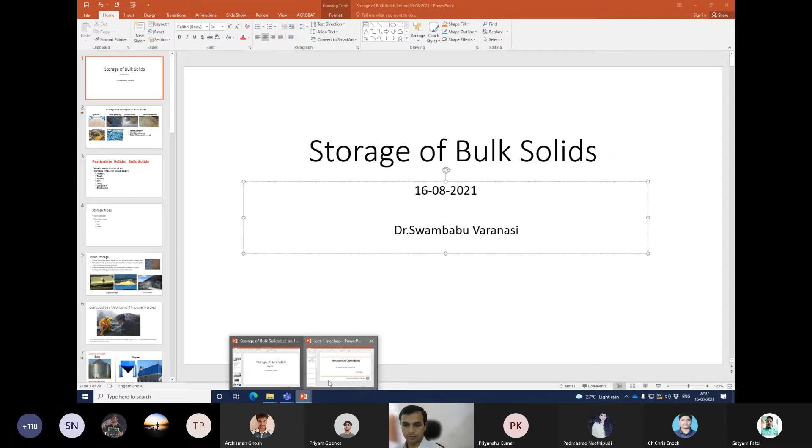So, today we will discuss about storage of bulk solids. Before I move on to today's lecture, I forgot to keep this slide.

All the green parts I will teach. As one student also asked, we wanted to not interfere with each one's topic. I'm starting with storage, handling, and transportation of solids, because this topic has no direct connection with the previous topics. Although interrelated, you don't need any basic knowledge of these topics to understand this. That's why I'm planning to start from this.

So today and next class we will talk about storage of solids. This is the overall course distribution. I'm going to start with storage, handling, and transport of solids. In that we have two subsections: one is storage of solids, and one is transport of solids. So today's lecture and next lecture will focus on storage of solids. That is the plan. Whenever I teach a class, I will show this course distribution slide and tell you where we are, so that you will have an idea.

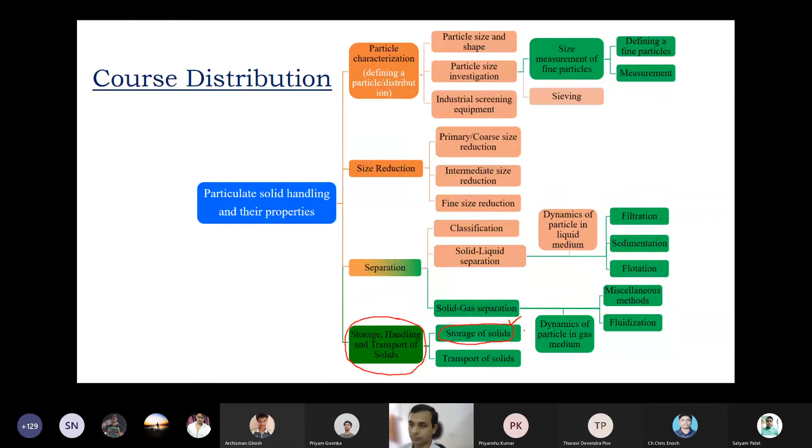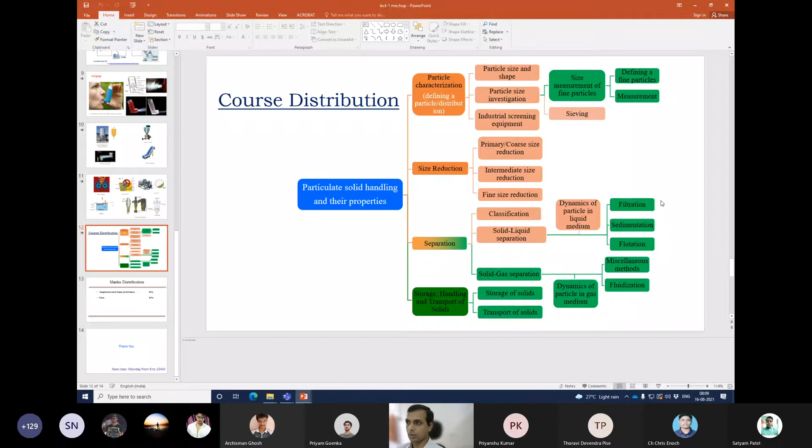Today we'll talk about storage of bulk solids. Bulk solids are used in so many industries. I just kept a few images here with broad industry names: agricultural industry, grains, and different plant products. We have mineral processing like iron industry, coal processing, processing of fertilizers, and processing of pharmaceutical products. So many mineral processing industries. Pharmaceutical comes in a different sector. Then we have fertilizer industries, where also we use solids, particulate matter, particles.

Then we also use construction materials like sand, cement, gravels, and those things. Even in food processing, also we use solid storage and solid handling, and pharmaceuticals also we use. There are some other industries like rubber, plastic industry where we use particles, pulp and paper industry also where we use solids or particles. Power generation, which also requires coal and slag - we also deal with slag and coal - and different chemical processing industries, like last time I showed phosphoric acid production, where we take the phosphate rock particles. So almost all industries, at the beginning or at the end, have to deal with solids.

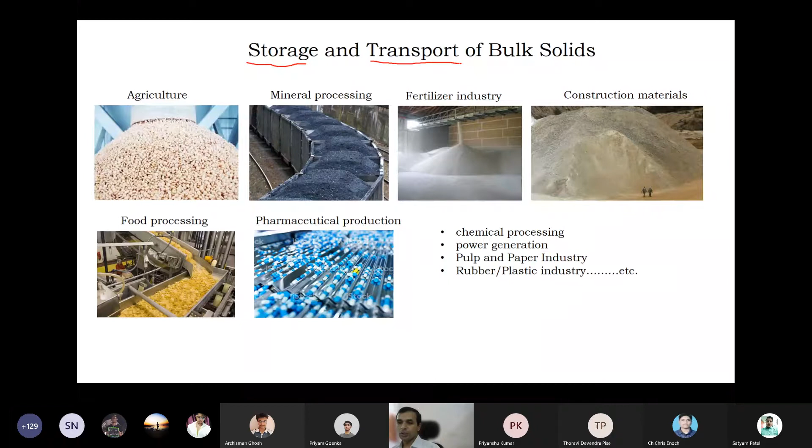When you have to deal with solids, you definitely will have two important aspects. As soon as you say I deal with solids, definitely two important aspects will be: you need to store them and you need to transport them. As soon as an industry handles or tackles solids, bulk solids or particles, then definitely that industry has to deal with the storage and the transport of the bulk solids, right? So we will go to the storage part today, and later we'll go to the transport part.

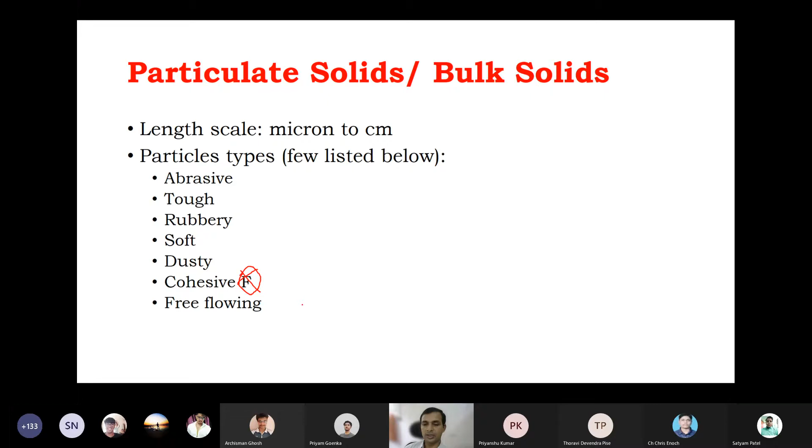Now, particulate solids, the bulk solids, usually in the range of microns to centimeter scale, and just to show how diverse it is, I have listed some particle types here: abrasive particles, tough particles, rubbery nature, elastic nature particles, soft nature of particles, dusty type, cohesive particles - sorry, there's a typo here - and free flowing particles. I'm sure we have seen all these types, either while playing in the ground or while taking food or while trying to purchase something, in our lifetime we have seen these types of particles, right?

So without going more into the general aspects, I'm trying to move into the actual topic, that is storage types. How do you store these solids? We have varieties of solids, and how do we store them? When we store them, what are all the important aspects we will come across while storing? What are all the problems we face while storing? That's all we discuss. The storage of solids is primarily of two types.

One is open storage, the other is closed storage. Open storage means just storing in the open environment - it's nothing but storing the solids in an open environment. That is the name, very simple name, and the definition also very simple. Closed storage means we are trying to store the solids in a closed container, an enclosed container.

There are three types, depending upon the specifications and the shape of the container. One is called bin, another type is called silo, another one is called hopper.

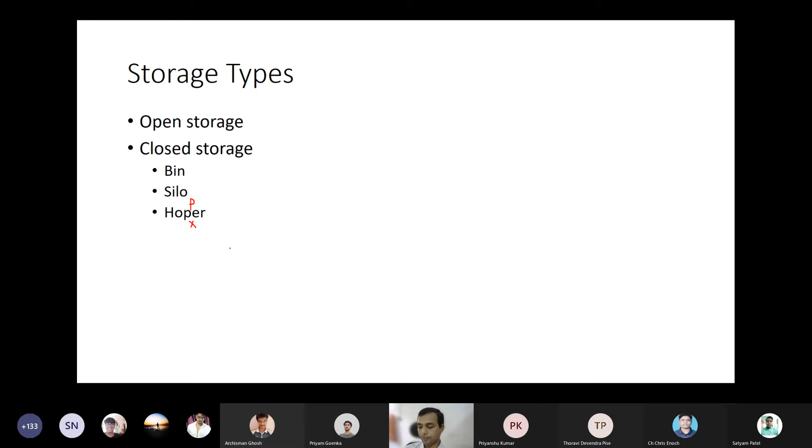Every one of us has seen people storing sand in the open environment, storing gravels or stones in the open, because nowadays in every part of the world some construction is going on. People love this construction-destruction syndrome. They break houses and construct new ones. People always want new, shiny things. We all love it, so construction and destruction will be unending.

That's why I'm sure all of us would have seen storage of sand and gravels. Why do you store sand and gravel in the open? Can anyone answer why we do open storage of gravels and sand?

They are cheap, like no one will steal them. They're low cost. Nowadays sand, not in all states but in some states, people are stealing the sand because it is becoming expensive. Any other reason? Thank you.

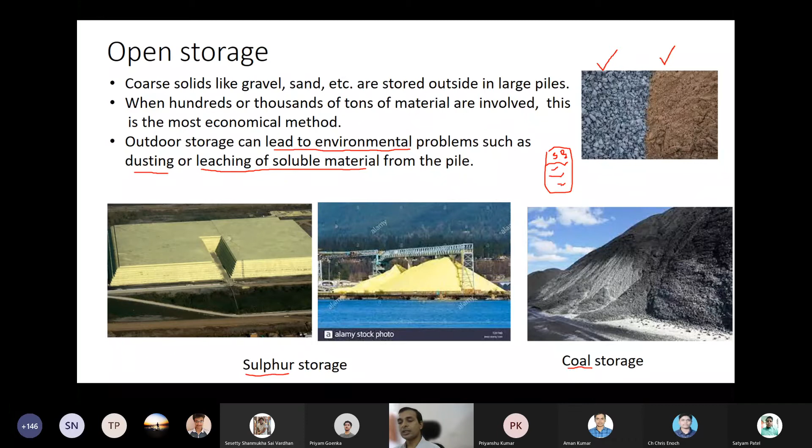I repeat my statement: if you store sulfur in a closed container, whatever free space is there will have oxygen, and this oxygen reacts with sulfur in an exothermic reaction, causing heat buildup. Over a period of time, that heat buildup increases, and at some point it will catch fire if you leave it as it is.

The same thing happens with coal. Coal could be a black bomb if improperly stored—this is the statement made by so many environmentalists. Coal could be a black bomb if stored improperly.

What happens? Coal reacts with oxygen and forms CO2. That's fine, but coal also reacts with oxygen to form carbon monoxide. Coal on the surface can have more availability of oxygen, and more likely that will form CO2.

But because this is a porous material, there will be voids in the coal pile, and there will be air in those voids. That air will be limited, lower than the stoichiometrically required oxygen. So there is a high chance of forming CO inside the heap.

We all know that CO is highly reactive and can emit a lot of heat. Of course, CO2 formation through oxidation and combustion also emits heat. So heat emitted by the CO2 conversion can, over a period of time, catch fire.

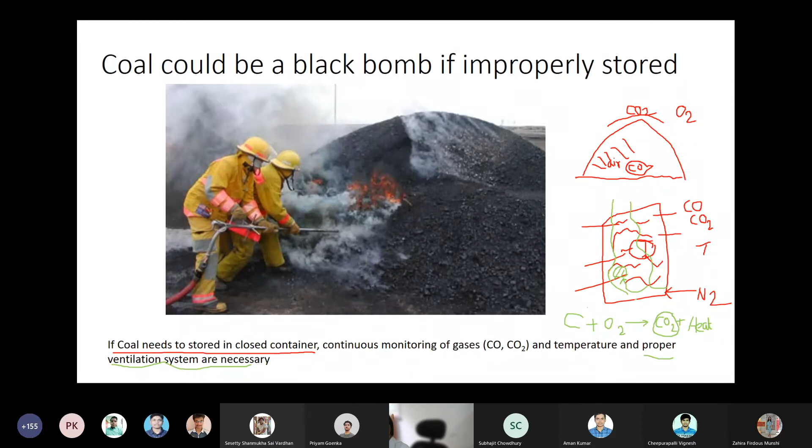So if no questions, we will move on to the next one. So far we talked about open storage, where we store the material in the open environment. Whenever you need it, you will use a reclaimer to fill the trains or conveyors where the solids are being transported. Now we come to the closed storage.

As I mentioned earlier, there are three types of vessels or containers used for closed storage. It's simple to understand from the name closed storage, we are storing the solids in an enclosed container. One type is called bins, which I have given a description of below. Bins, silos, hoppers are all similar, but there's a very small difference. Bins have a large diameter and small height, and are usually made of steel.

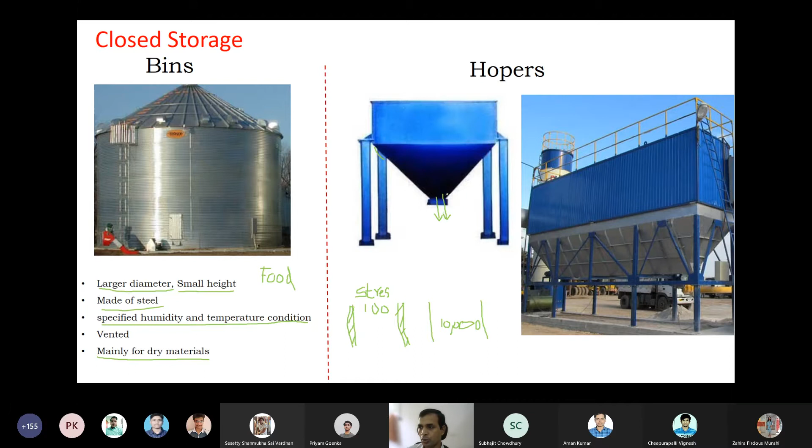Whenever we have the cone, the flowing of solids is easier than without the cone. We all know that, and I will show more details later. Another important thing is called silos. Silos have a smaller diameter and are tall.

At the end of today's lecture, you will understand why we need to maintain small diameter silos, why the silos need to have a smaller diameter with a high length, the L by D ratio should be very high. Why is that we need to maintain a very high L by D ratio? You will understand at the end of this class.

I have a special slide to explain this factor, so I will explain that part later. More often the silos will have a small diameter with a higher length. The silos can be made of concrete, wood, or steel, depending upon what we are storing.

So suppose if you store coal, you don't need wood or steel, we can make it with simple concrete. If something is very sensitive, or it can affect the moisturizing properties very much, then we have to use steel, because steel can stop the permeation of moisture from the outside environment much more than concrete materials.

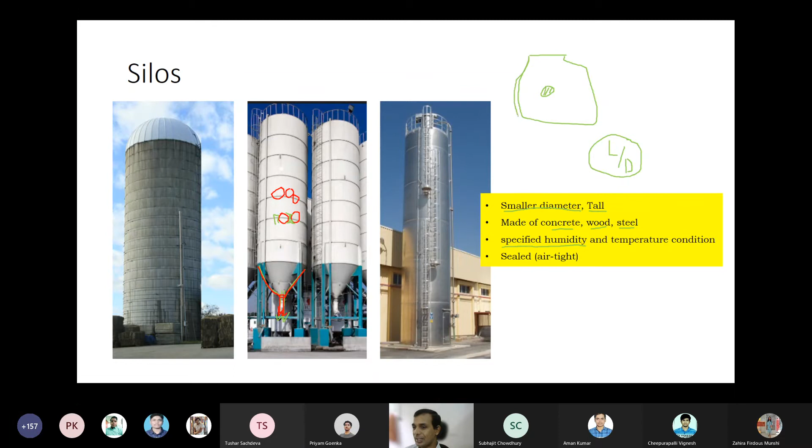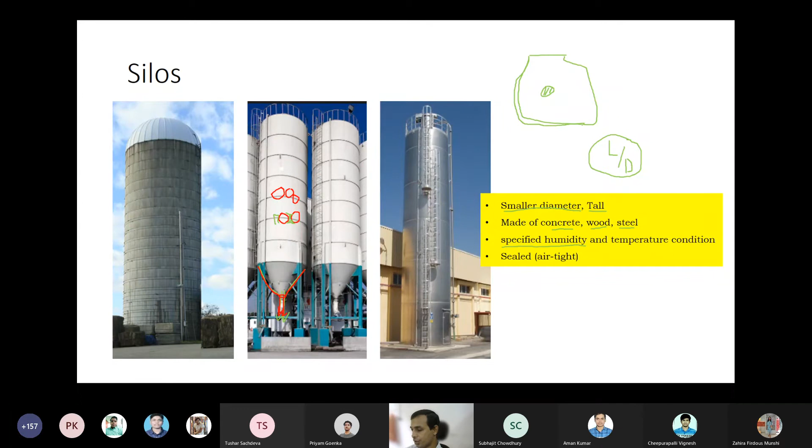If you store certain capsules in a box, they place silica gels with them. Whenever they sell capsules or leather shoes, they keep silica gels because these materials can absorb moisture from the environment, causing decomposition and loss of ability. Shoes, if soaked for a long time in a closed place, get degraded. So they keep silica gel because it can absorb moisture much faster than other materials.

There are two videos from this website. Jenike worked very hard on this silo design, because it's not just about storing—after storing, how to take it out is the most important part. If you're not able to take it out, there's no use. The whole purpose of storing is that whenever required, we need to take it out.

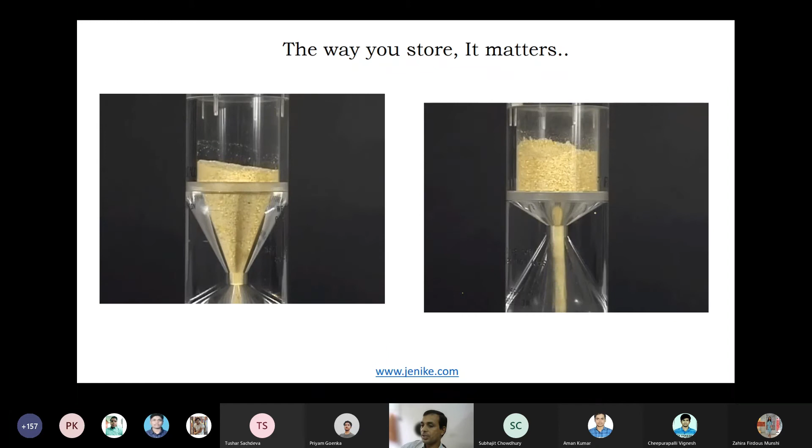To take the solids outside, you have to have a cone at the bottom. Depending on the cone, the particles will flow out very easily. Depending on the cone angle, the flow of particles changes. In the first video, the cone angle is very high, so the flow is easier. In the second, the cone angle is very low, so the flow gets obstructed time to time—stopping, pausing, then suddenly falling. That way there is no uniform flow.

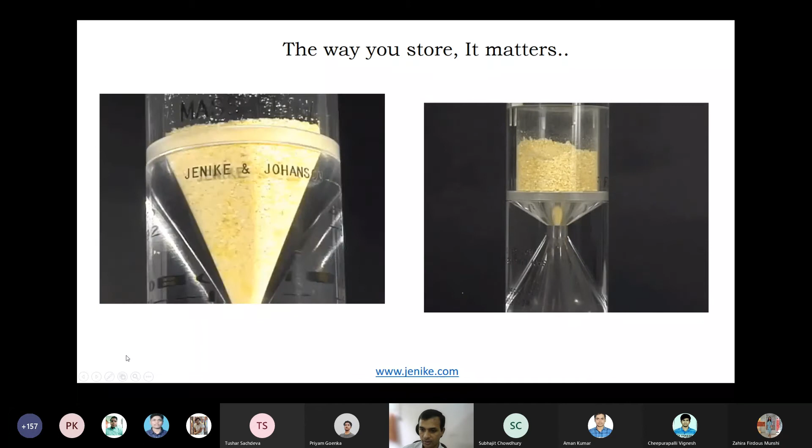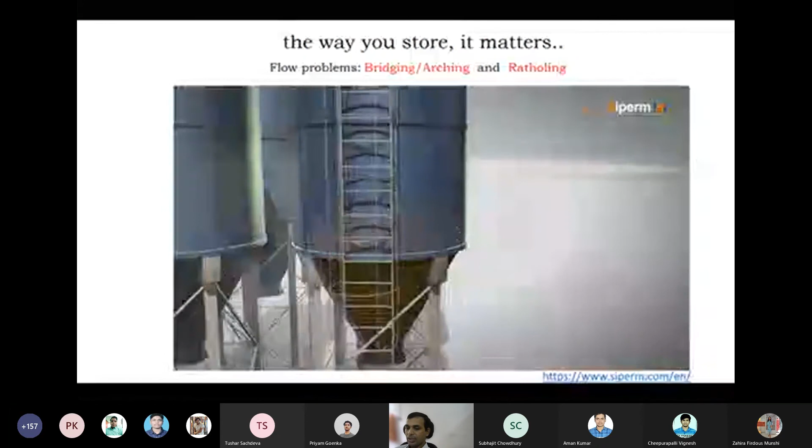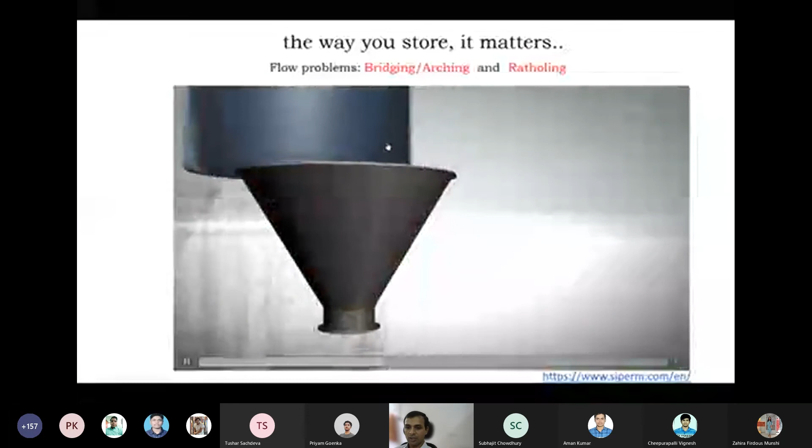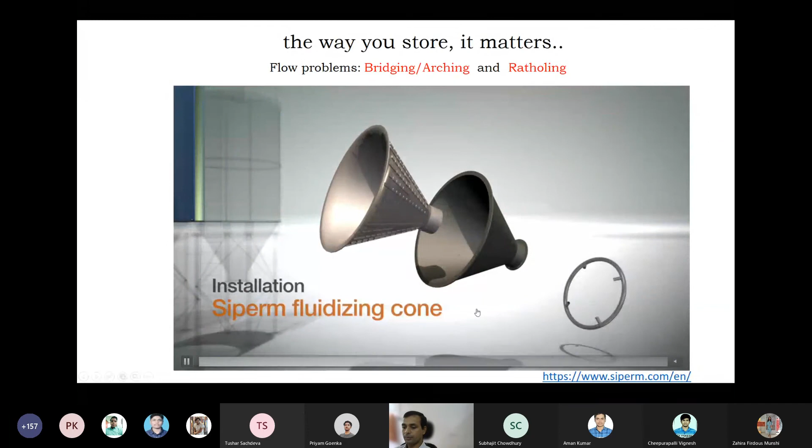Here is another video. This is a typical silo where bulk solid materials are stored, with an opening at the bottom. I'll show later the specific wall we use. Depending on various factors, one problem that can happen is bridging. Another problem is called rat holing, where some materials get stuck at one corner and material only flows at the other corner. This is called mass flow, meaning the particles come out from the silo at a uniform rate. Here you can see the particles coming out at a uniform rate.

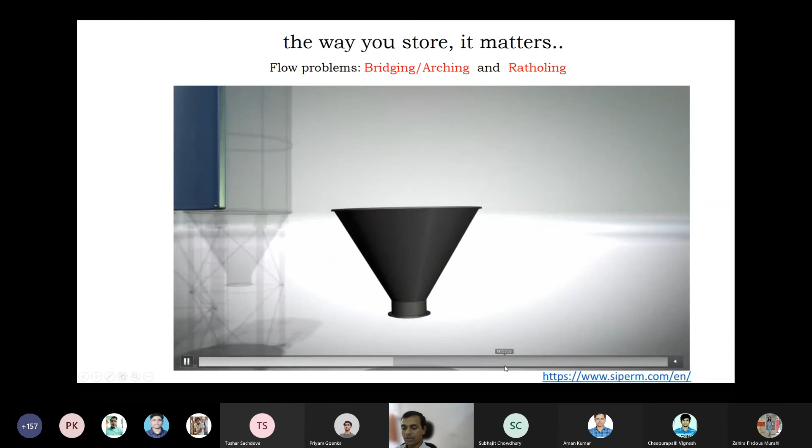I will not touch this. You can see that after a few seconds, this is rat holing.

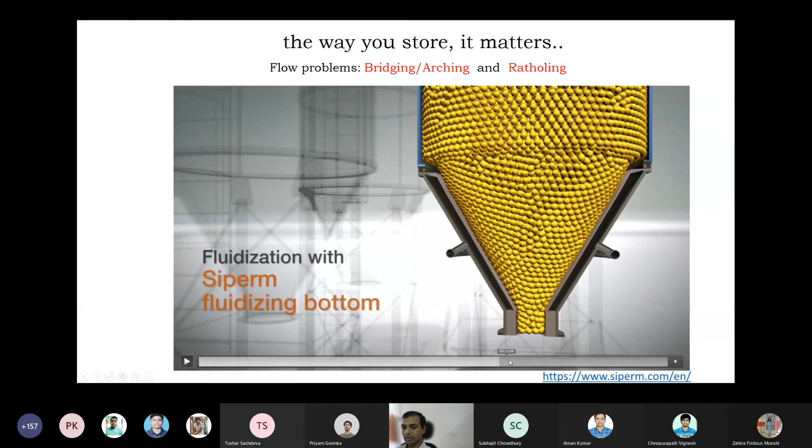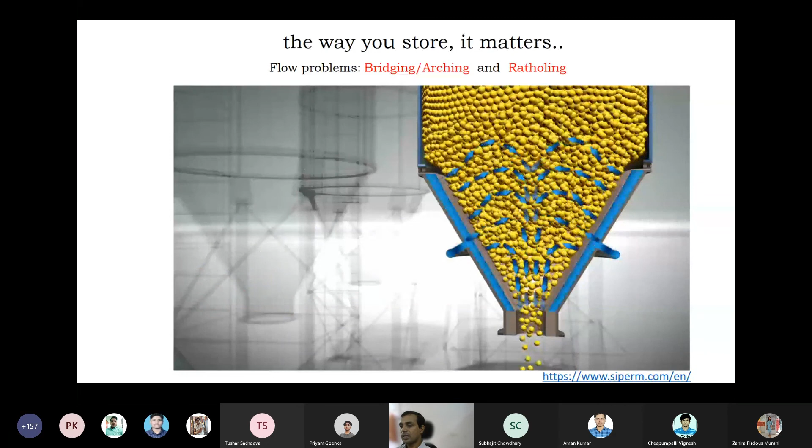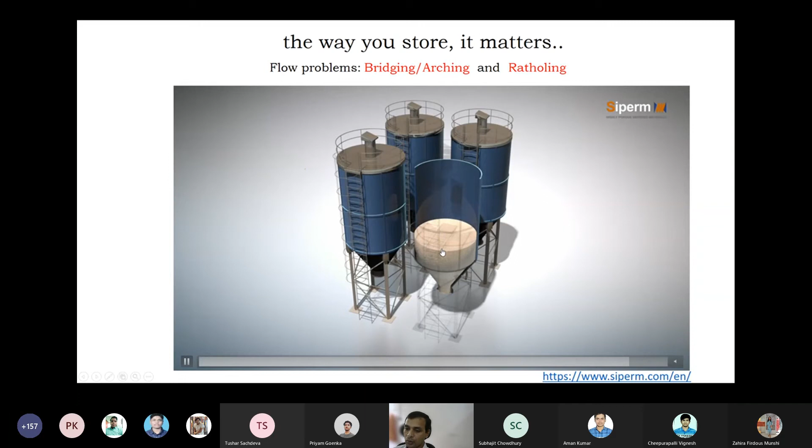See here the particles are flowing uniformly. The particles are coming out uniformly, continuously, and that is the most required condition when we talk about the flowability of the particles and the discharge of the particles. You can see the particles are flowing out continuously at the uniform rate.

So that's why we kept this simple thing to highlight the way you store it. It matters. If you don't store properly, you will not be able to take out the material at the uniform rate, or it can get stuck. It will cause so many other problems. What is most conducive is mass flow.

So this is called a rotary valve. Often this valve is used whenever you want to discharge the solids from a stored container. So how does this valve look like?

So this is the circular cross section. This is the discharge. Based on this discharge outlet, they will make vertical cross sections and divide it. Let's say this is the cylindrical disc. You can make it into parts.

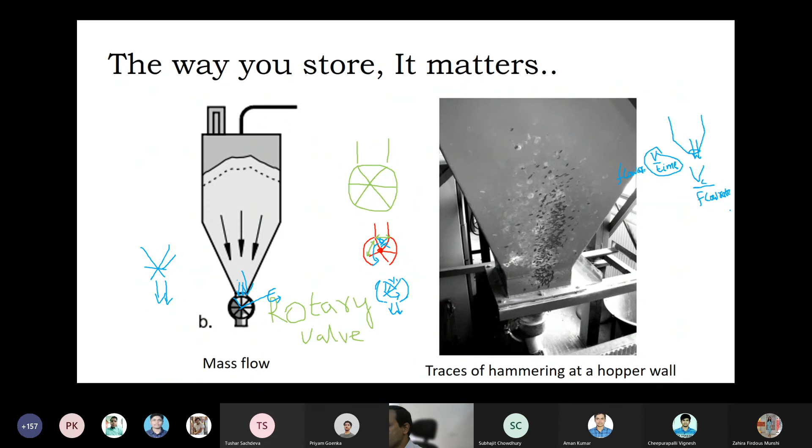Do you understand? Yes sir, thank you. So you will understand by next class how to get that rough approximate flow rate calculation.

I will explain a little bit later because we need to cover some other topics before that. So the most important thing is, when you discharge the solids, if you're not able to take out solids easily, then the whole purpose of storage is lost, and storage doesn't help us.

That's why the discharge of solids from silos is also important. How we take out the material depends on how and where we store it. So here, a very critical factor is this cone angle and other properties, which we will discuss a little later. If you don't have a proper design...

What will happen? The particle gets stuck, as I showed in the previous video. Then what do we have to do? If anyone has gone to local mills - I don't know how many of you have, because you were all studying hard, staying home - but in my childhood, my mother used to send me to take rice to the local mill to get rice flour, or take wheat and press it to get wheat flour. Nowadays we have commercial attas, but in those days we had to make it ourselves. So if you go to local crushing mills where they make wheat flour, rice flour, and other things from grains, you will see they try to beat it, hitting with a hammer for the discharge of the solids. Anyone experienced this?